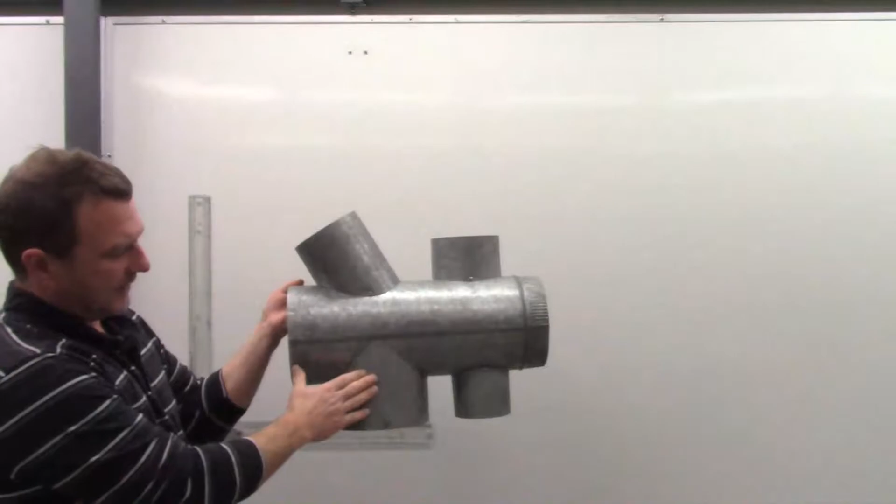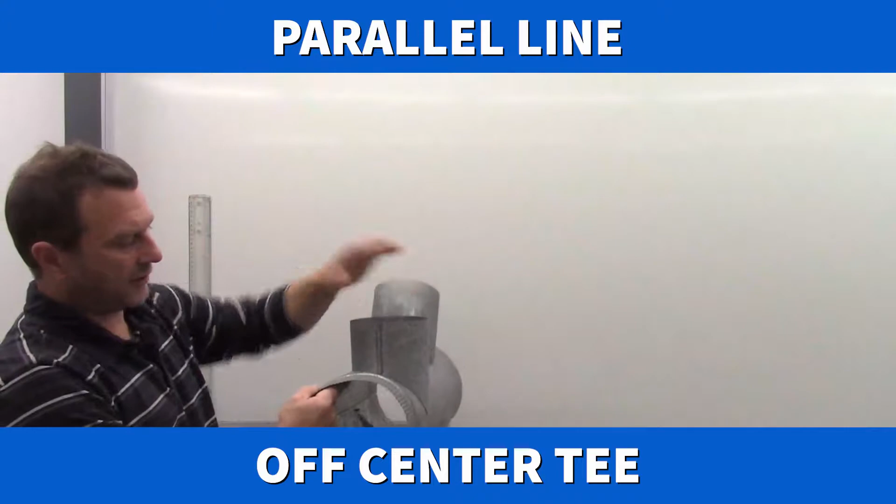Hi, we're going to carry on with our parallel line pattern development on our tees. So far we've laid out the equal diameter 90 and the unequal diameter 90, and now we're going to lay off an unequal diameter off center, which is this front one here. We can see it's not centered on the pipe anymore. We're going to offset it to one side—it can be flush on one side, or it can be anywhere within the pipe, but not on center per se.

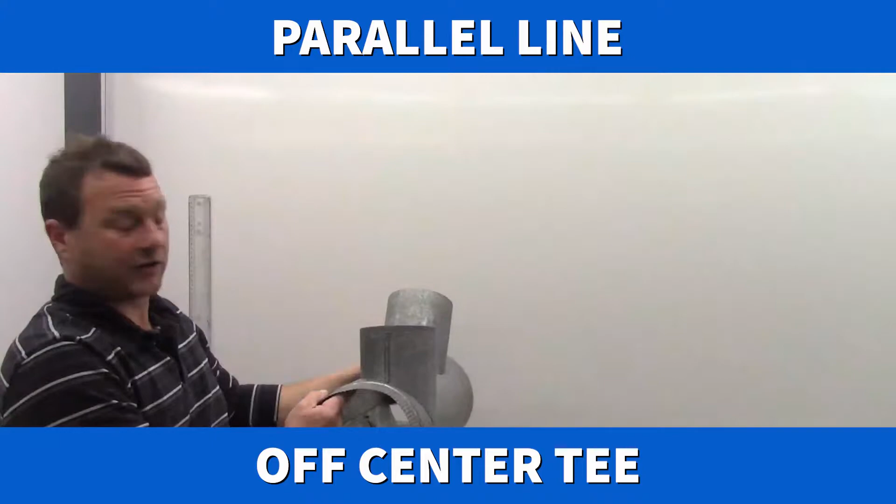So let's start off with our full front elevation and side elevation.

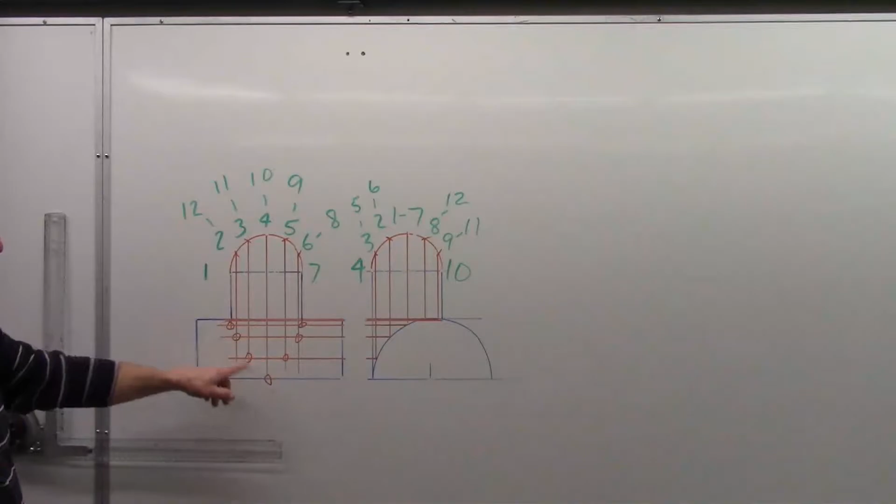Okay, so I've got my front miter line established, and I've gone through and found point 1 and point 1, come down here, and 2 and 2, 3 and 3, 4 and 4, etc., and then back up.

Now I'm going to go around the back side. So the back side we're going to point 8 now, because we already did 1 to 7.

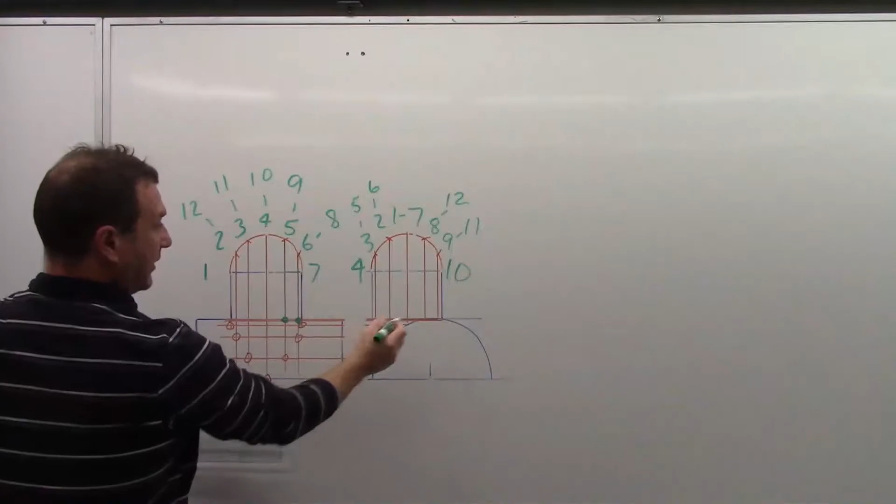We'll come to 8. So point 8 is here, and that's pretty close to the top, so that's up in this one here. And then 9 and 9, that's up there too—that actually rises a little bit. And 10, that one's down.

And then it's going to come back to 11, up a little bit.

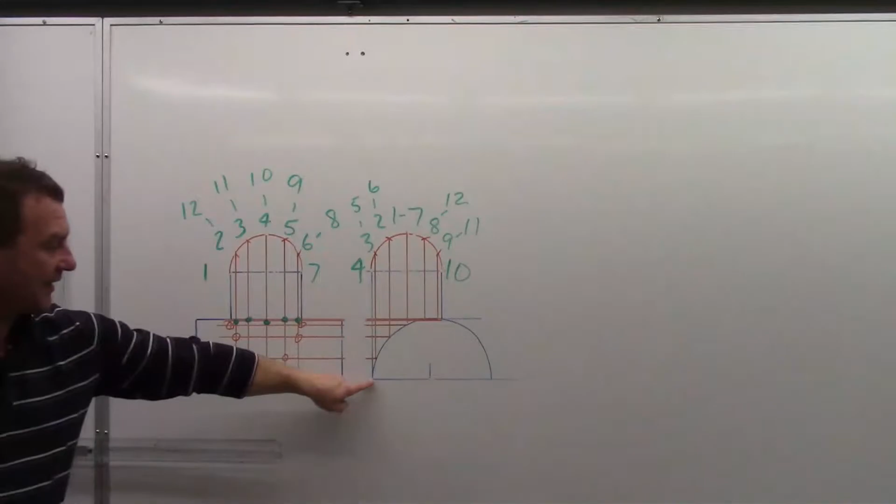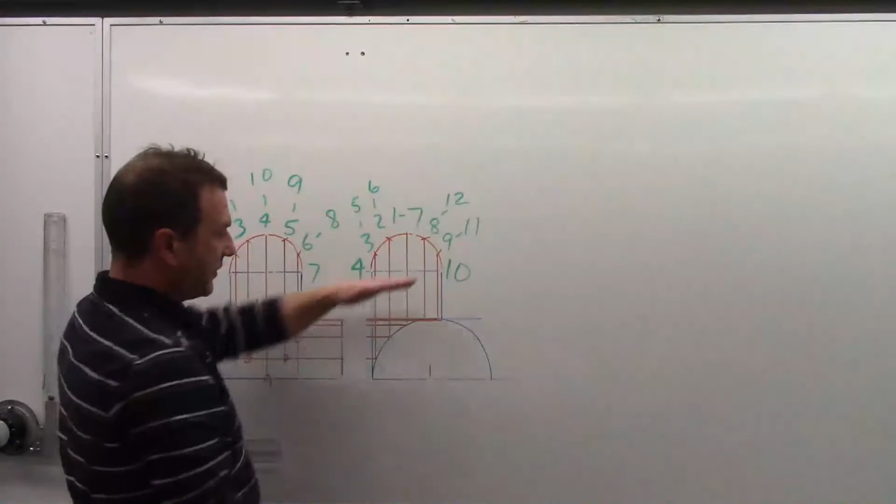There we go. So we have a really shallow miter line for the back side, and on the front side we have this peak because we know it's coming to center because it's flat here—that's what causes our peak here. And then on our shallow side, we can see if we brought up center, it doesn't come down very far as the height this way, right? So it's not going down into the pipe much on the right-hand side.

So now we've got our miter lines, we can go on to our stretch out here now.

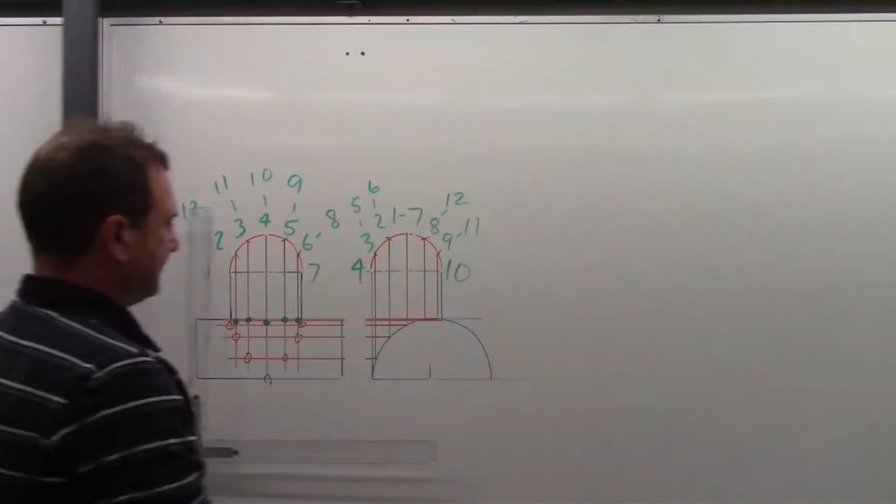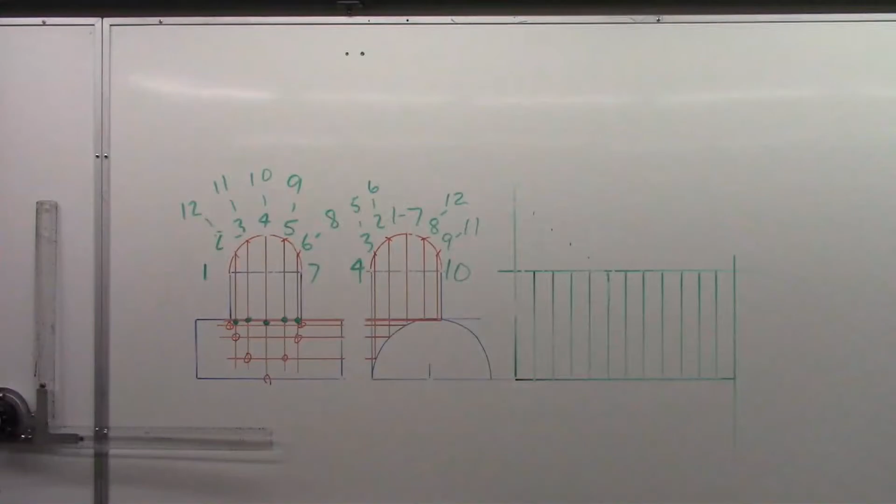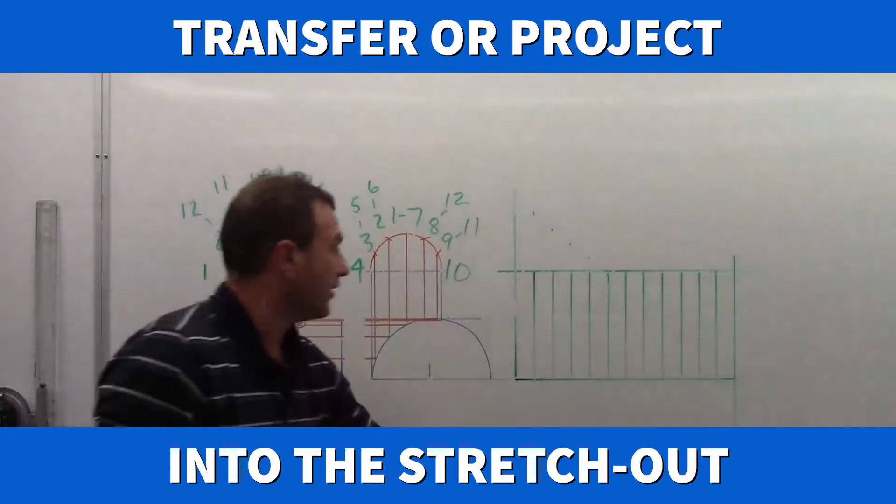Okay, now again we can take our points from our miter lines and project them into our stretch out. Again, we'll choose a spot where we want our seam—let's just choose number 1 again, and we'll label our stretch out.

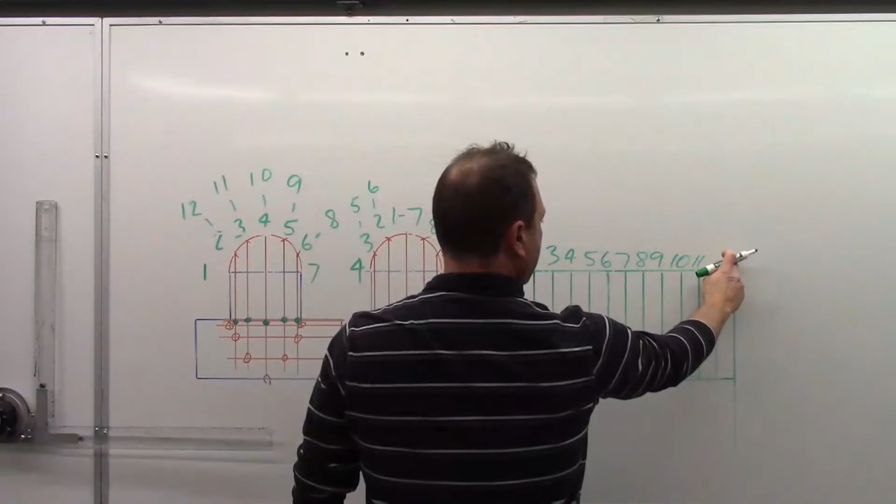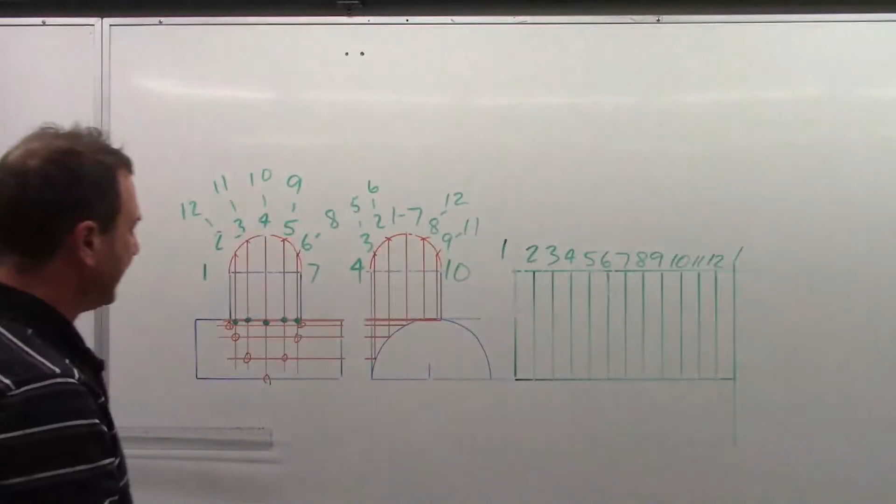Start and end at 1 to create point 1. And we project our points in, pick up 1 and transfer 1, pick up 2 and transfer 2. But going back, remembering our last videos, we know that we don't always require this front elevation.

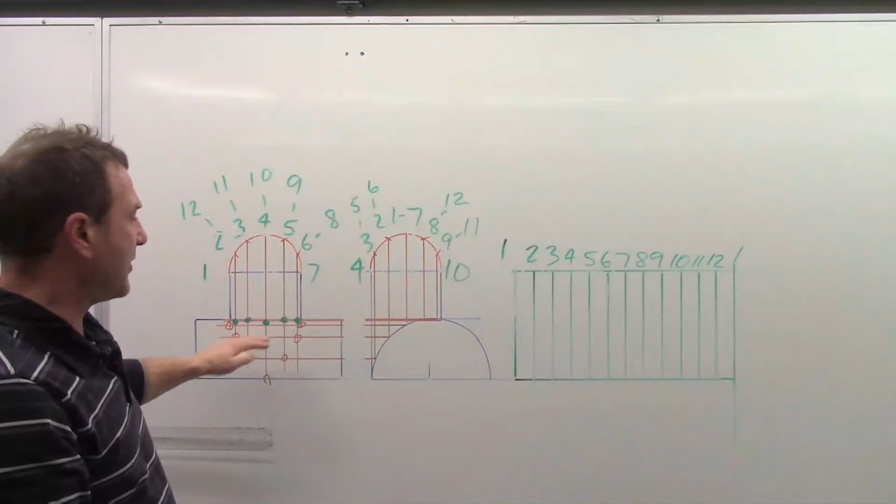We want to be able to imagine the miter line, and it's nice to see that miter line, but it's not essential to create our pattern. We can work from here. And what we said in the last video is we know our seam height, we know how much above the pipe the T will rise.

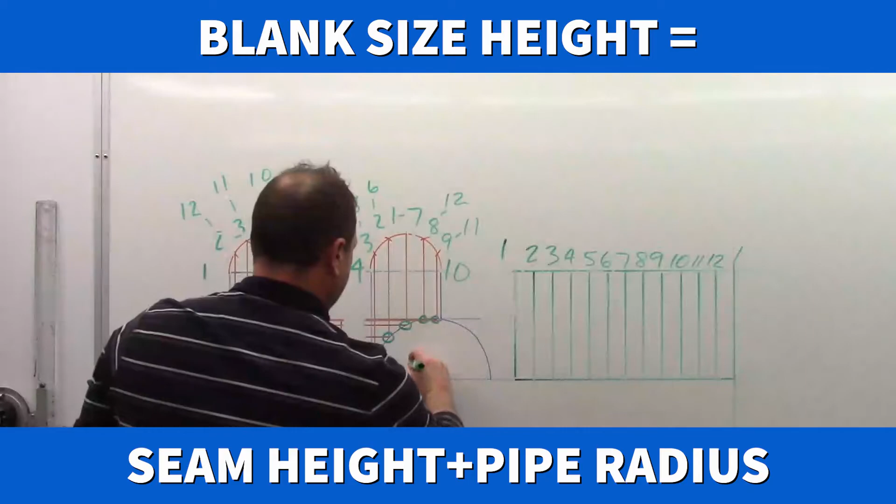And what we also said was it doesn't matter where this profile is. If it was up tall or way up here and we still projected it, it would still hit the same points. And when we hit those points, it gives us the height in here which we require.

So the key component to this type of layout is finding where the T hits the pipe—that is the key. Where it hits the pipe will give us this distance here, which then becomes scrap in our pattern, and it'll give us our shape that we want.

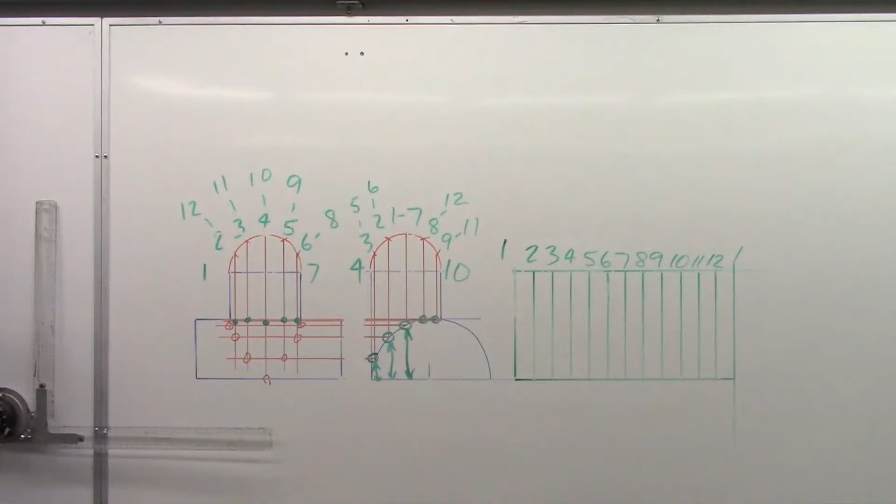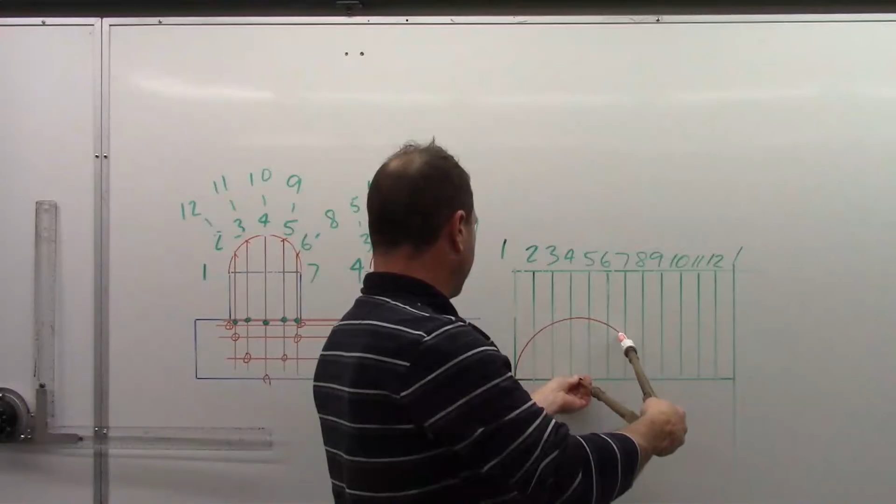So again, let's go into looking at that in a different way. Last time I swung a quarter circle because we had a line of symmetry. This time we don't have that line of symmetry.

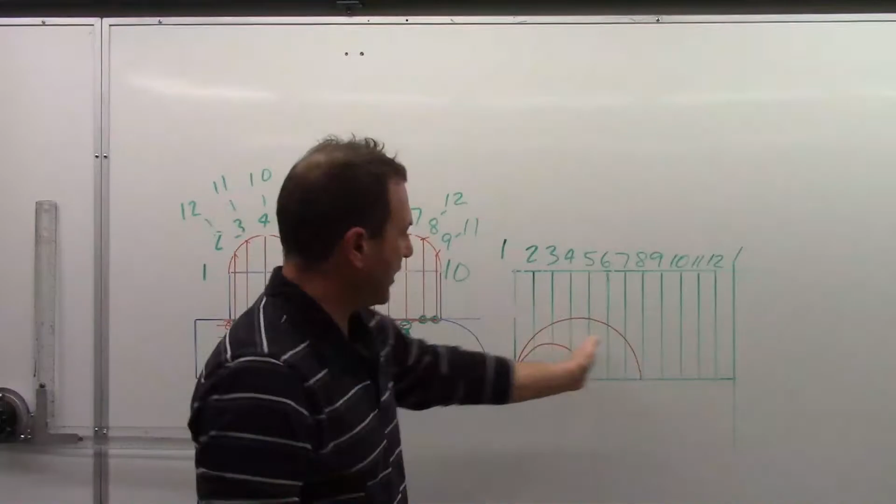So we require a half circle in this case for an off-center, because we want to see what it does left to right here—it's different. Okay, so let's divide the T.

Bring those points, the divisions of the T, into the pipe, and those will then create our horizontals. Those two are almost in the exact same spot.

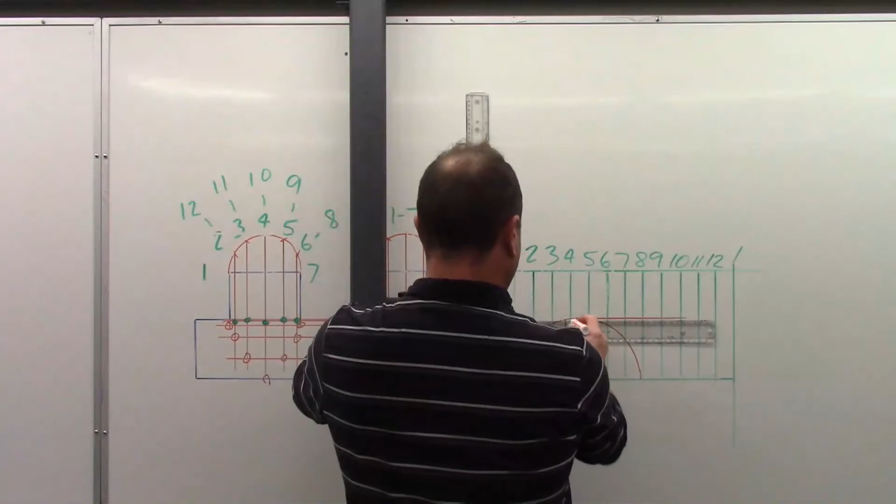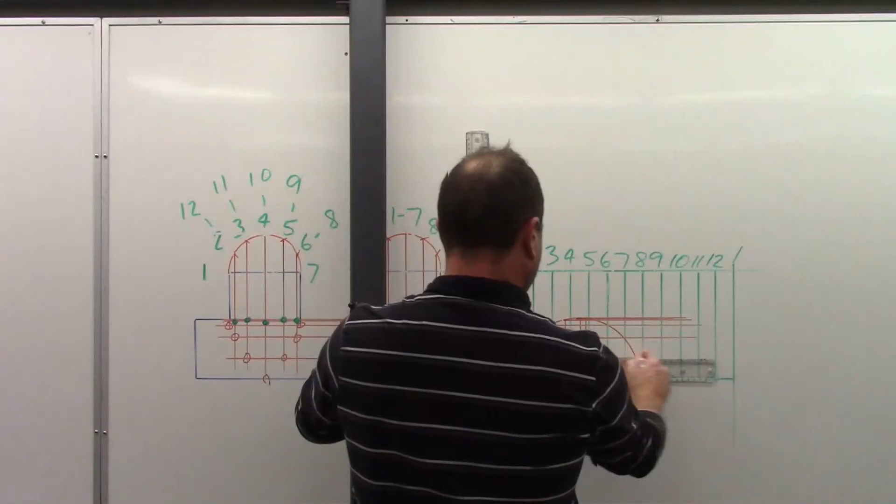Here, this is 1, 7 here, 2, 3, 5, 6, 8, 9, 10, 11, 12. So we follow our points: 1, 1 is here, 2, 2 is there, and so on. Connect all of those to make our pattern.

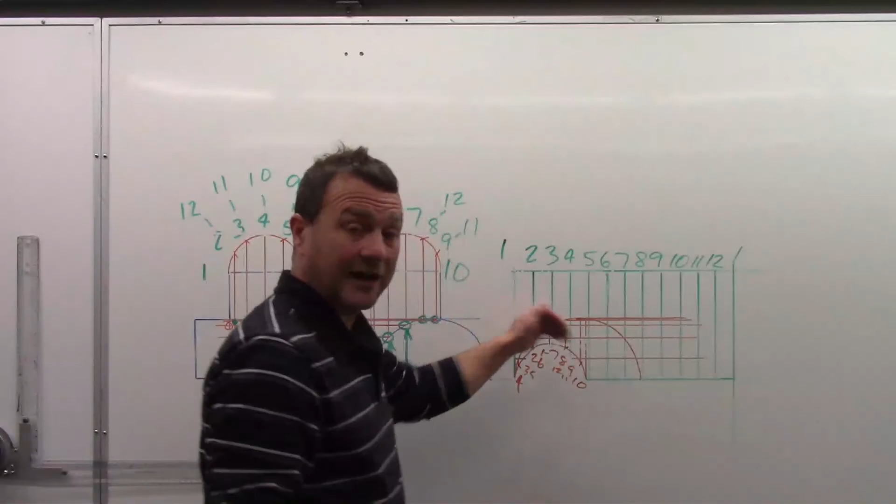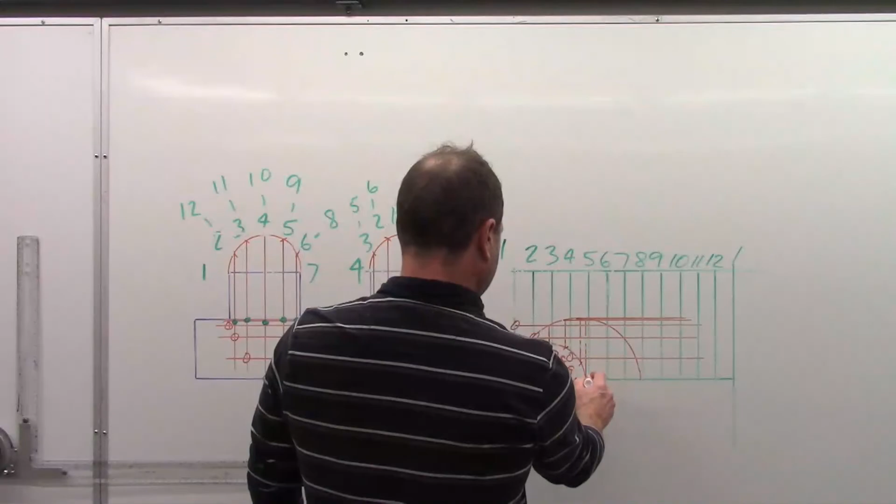And again, our pattern is not going to be symmetrical because it's not symmetrical—it's off-center.

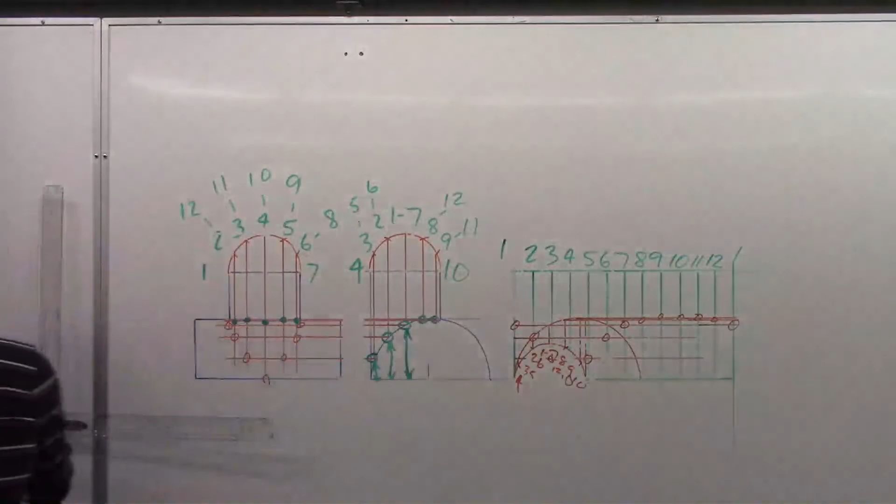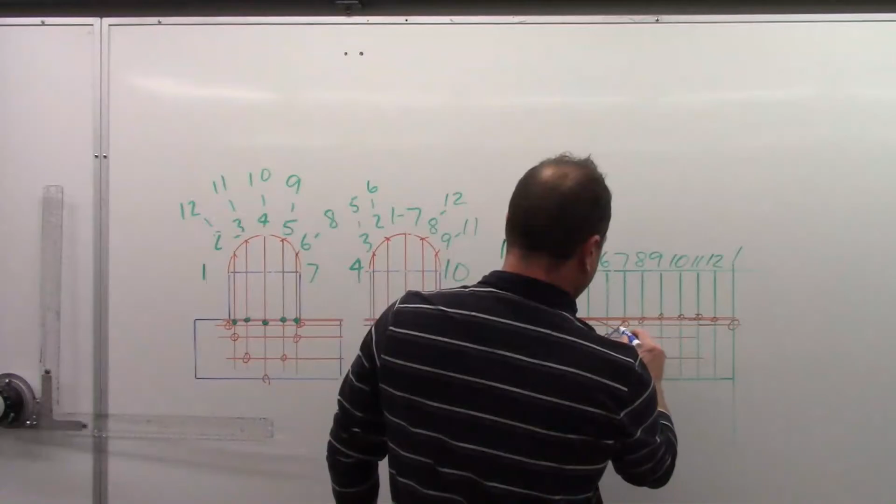So our shape in this particular one comes at our peak here and then turns up, something like that. So again, because we're not symmetrical left to right, it's not going to be symmetrical in our pattern.

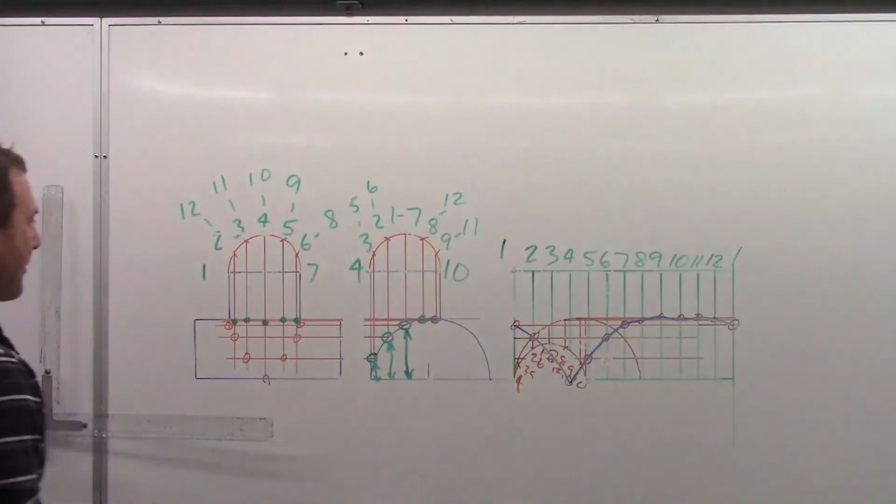We're not going to have shapes the same on both sides. And that's our off-center T.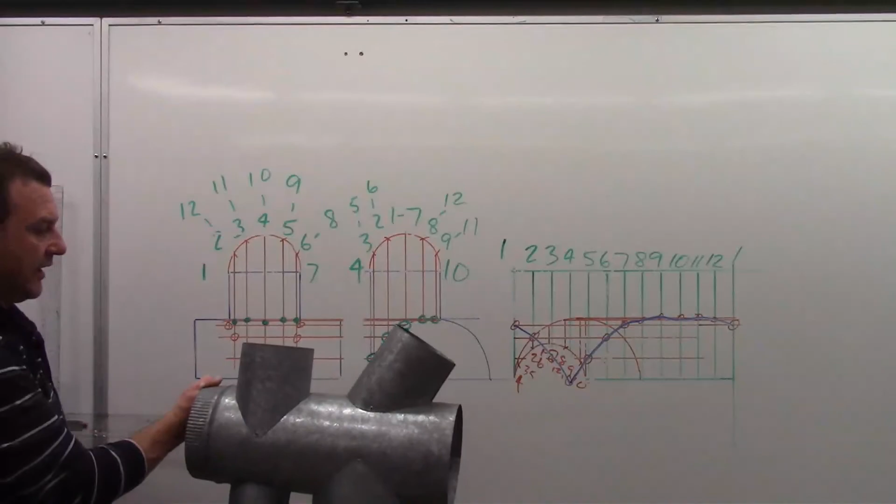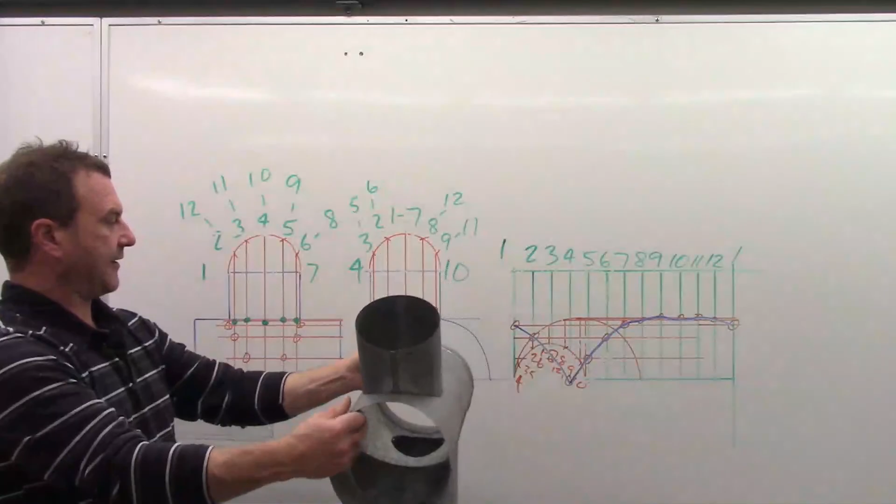Something also to note on this one: if we look at our sample again, and if we're looking at it this way, we see the flush up front here. We rotate it this way, so that the flat is on this side here.

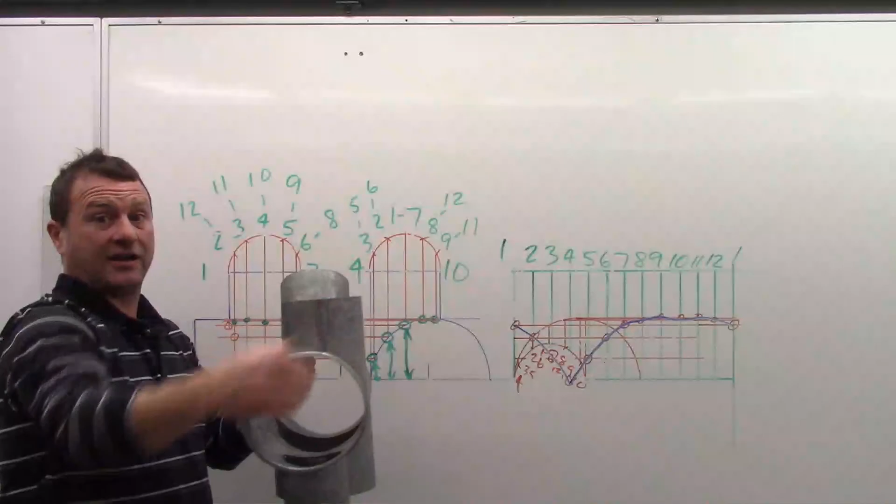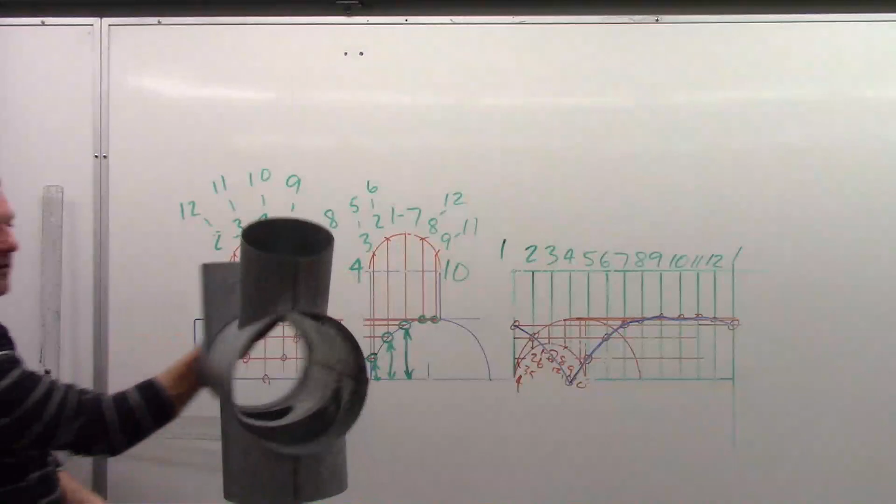The other way is to look at it this way, where we can't see the flush—it's the offset, the small portion here—and then we'd turn it this way and we'd be flush on the other side. So keep in mind which way you're going, but always bring the right side around, be it this way or the other way, okay?